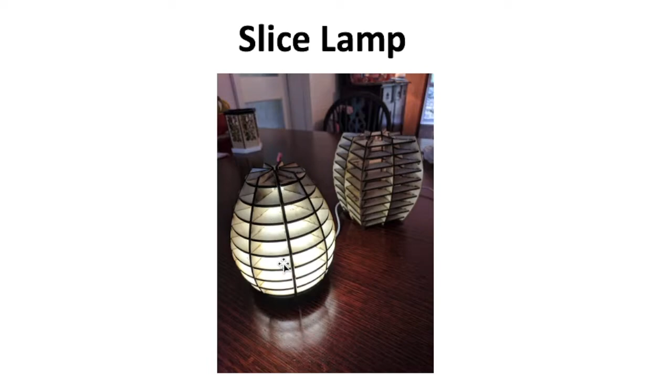In class, we're going to be building a design like this so we can build our own lamp. It's going to have a series of LEDs with a USB cable which you can plug into your computer or a phone charger. We'll make it in slices, hence the name slice lamp. The material can be plywood if laser cutting, or cardboard or plastic fluted board if cutting with a knife.

We're going to start these designs in Fusion 360. We'll then export it to Slicer for Fusion, so you need to install this software, and from that we will be exporting the design into different slices to make the lamp.

Now you can see I've got two different designs here. I've got a round one and a more square one with corners. Depending on how you want to make your lamp, for the round one you're going to use the revolve feature. I've got a sketch which is then revolved or spun around 360 degrees to make that shape. To make one with a more square profile with corners, we wouldn't be able to spin that profile around because you wouldn't get the corners.

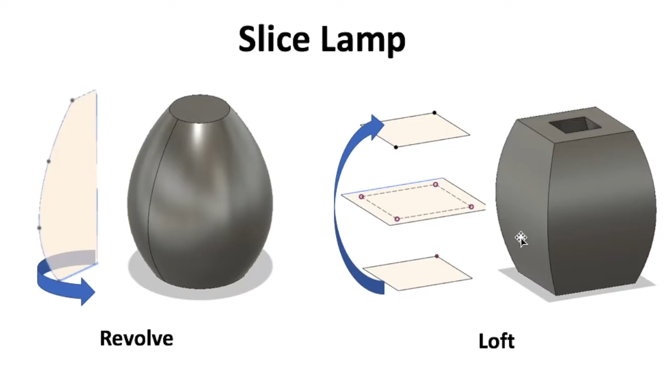We're going to use the loft feature instead. So we're going to create a series of sketches. I've got three rectangles there on three different sketches, and we're going to loft that profile to make this shape. So those are the two features we'll go through to make our lamp. Let's get into Fusion 360.

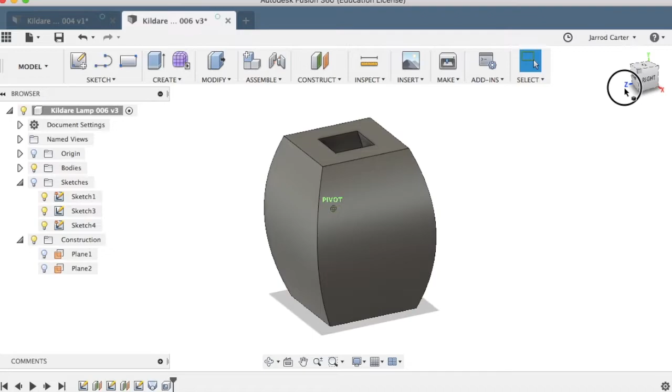We're in Fusion 360 now, and this is the first design I'm going to go through, which used the loft feature. You can see I've got the basic shape there that would make our lamp. So this is what we're going to make, but I'm going to start a new design.

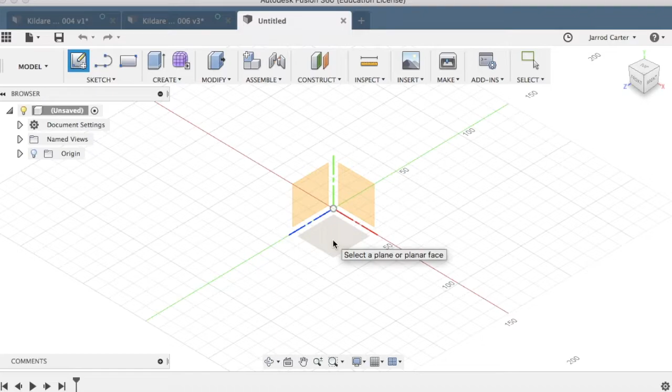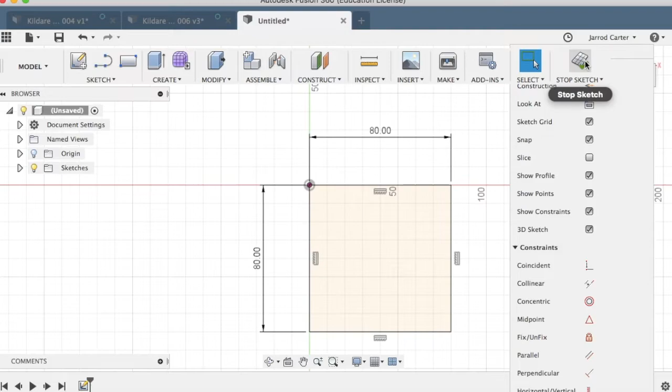The first thing we want to do in our new design is create that bottom sketch. So to do that, I'm going to go sketch, create sketch, and it needs to know which plane. These are the planes, remember that because we're going to make some new planes later. I'm just going to select that plane there, and that's just a simple rectangle shape, 80 millimeters by 80 millimeters. Hit enter, and hit stop sketch, and easy as that, we've got our first sketch there.

Now the second one we're going to do is a little bit bigger, and it's going to be in the middle. But what we don't have yet in this design is one of those planes that I pointed out before, up here in the middle, so that I can create that next sketch.

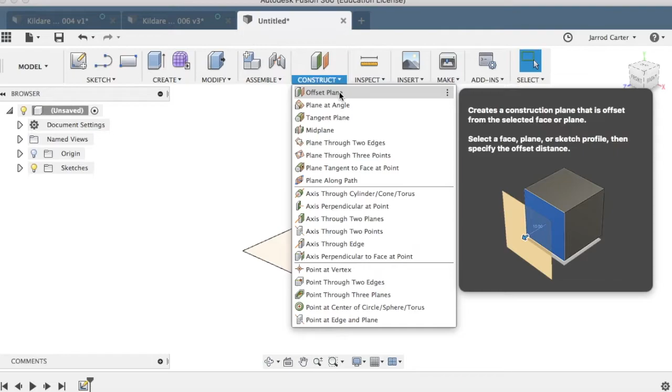To do that, we go into construct, and there's lots of different ways to make more planes, but I'm just going to pick the first one because if you look at the picture, you can see it's just an offset plane. So I pick which plane I want, and I say I want to offset this new work plane above that. I'm just going to pick 70 millimeters, so that's in the middle, and I know that this lamp is 140 millimeters high.

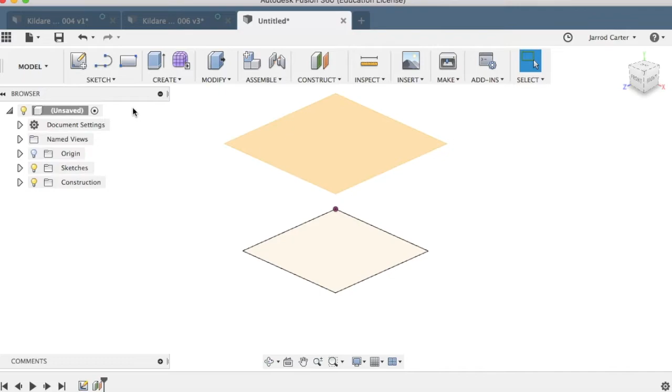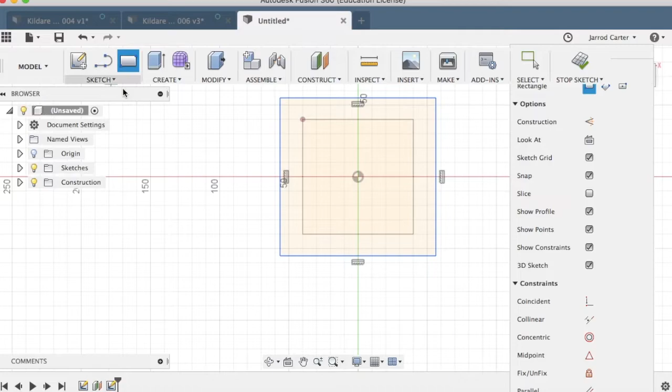You can see this next rectangle is going to be a little bit bigger, so let's get into that. Again, we just go create sketch, I want my new one, and the great thing is I can still see the first one I did. So all I'm going to do is go rectangle again, just the first one, and I'm not going to put any dimensions. I'm just going to draw it out like that, make sure it's bigger, and now I'm going to say how far apart I want it, or how much bigger I want it than the previous one.

I'm going to go to sketch dimension, or just hit D on the keyboard, and put a dimension between these two lines. Remember, it takes a couple of clicks - 1 click, 2 click, 3 clicks. I know I want that 15 millimeters.

You can do your own design. So remember, 1 click, 2 click, 3 click, 15 millimeters again. 1 click, 2 click, click out in space, 15 millimeters. And the final one, 1 click, 2 click, 3 click out there, 15.

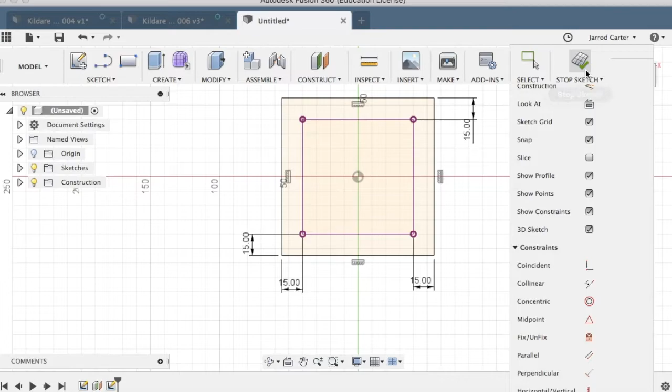I can hit stop sketch again, and just in a few minutes we've already built up the first half of that lamp. Now I need to repeat this first one, up the top, because this is a symmetrical shape.

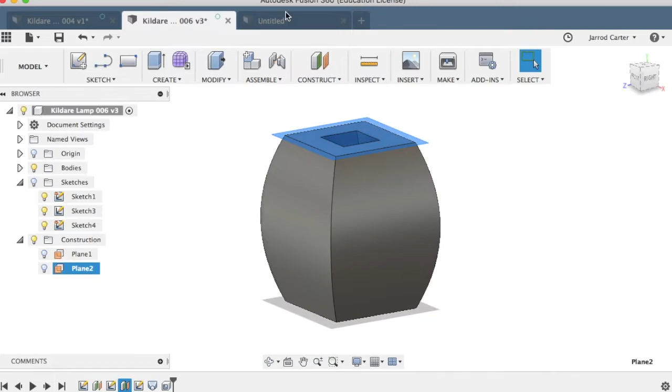But first I need to put another work plane, like I put a work plane here - I need to put another one up the top. We know how to do that: construct offset plane. I'll hit that one. We know it's 70 millimeters up. Great, I've got my 70 millimeters.

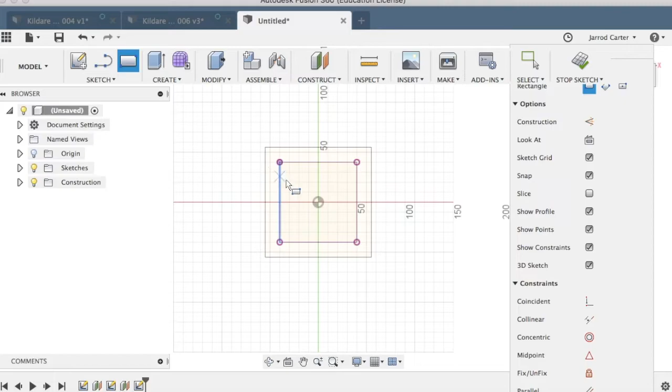I'm just going to create a new sketch again - create sketch, hit our new work plane. Just like before, it's really good that I can work off the information I've already done. So I'm going to go rectangle, choose the first one, and I don't have to put any dimensions in. I'm just going to grab this corner, drag it out, this corner, and I know it's the exact size we want, and there we go.

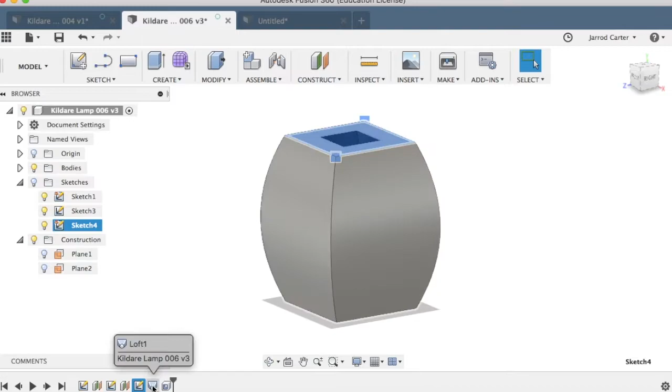So now we have our 3 sketches - 1, 2, 3 - which are going to make up our loft. So there's our loft feature. That's how we're going to build this shape.

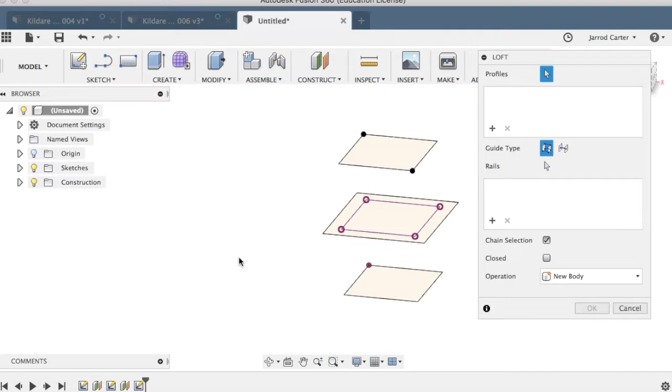So we're done with sketching. Now we're moving on to the creation side, and I'm going to choose that loft feature. As you can see from the preview window, it's creating a 3D profile from different shapes - in our case we've got 3. So it needs to know which shapes we want in our loft.

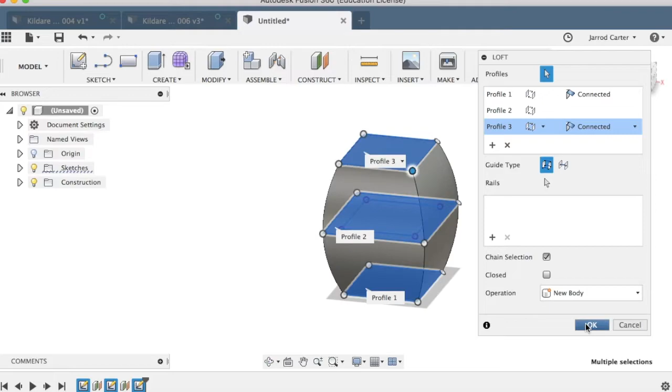I'm going to choose 1, 2 - and notice this one, because it used that information from the first one, I just need to click it twice - and 3. How's that? That's pretty good. Lots of different features here, you can play around with them, but I'm happy with this as a new body, so I'm going to click OK. Now let's just go back to the PowerPoint.

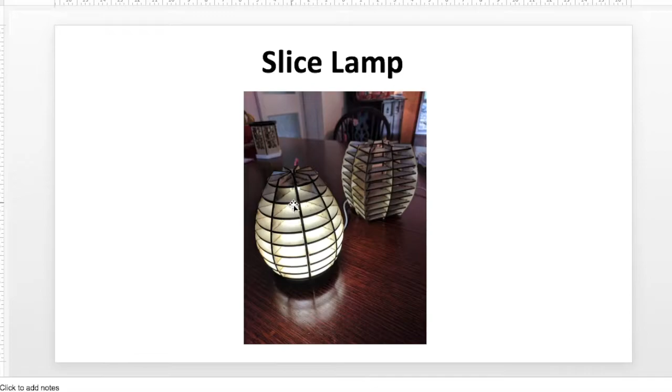To build our slice lamps, we're going to need it hollow in the middle. We're going to need to shell it out on the inside just to give some room for the light to travel between the different layers. So each one of these layers should be hollow in the middle, and you should be able to see that as well. I'm just going to show you how to do that feature.

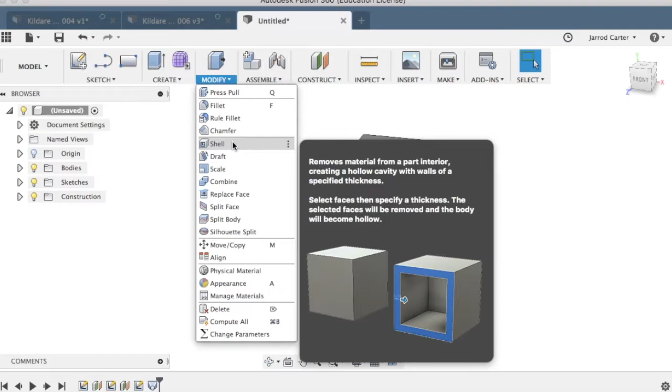We've created our shape, now we need to modify it, and we can see shell there. If you look at the picture, it's exactly what we're going to do - take our solid shape and hollow out the inside. So it needs to know what to keep, so I'm going to say keep that face open.

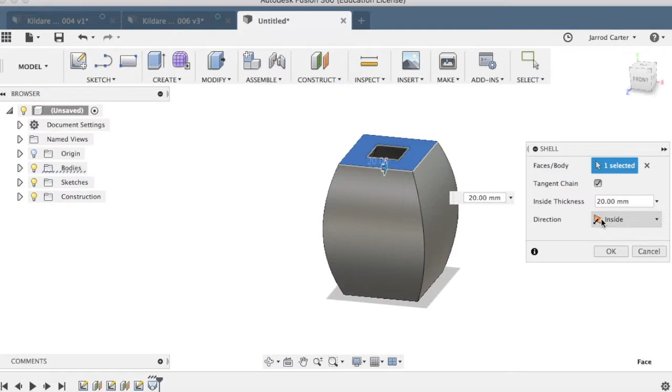I'm going to set my thickness. Now I know from experience with these slice lamps that 20 millimeters is perfect. Obviously we want to hollow out the inside, so I'm going to hit OK. If I move there, it might be a bit hard to see, but that has shelled out the inside in a uniform shape - now you can see it.

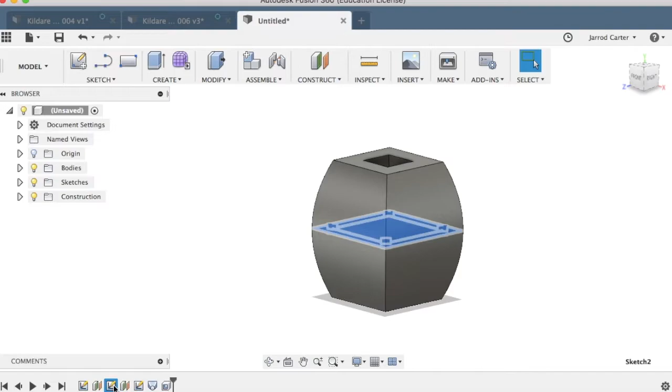So you can see it curves around with the profile - that was the shell feature. So the 3 main ones I used there were the sketch for the rectangle, offset plane to create our different planes, and then the loft feature, which was in create, to make our 3D body, and then just to shell it out at the end, I used the shell feature at 20 mil thickness to get that shape in the middle.

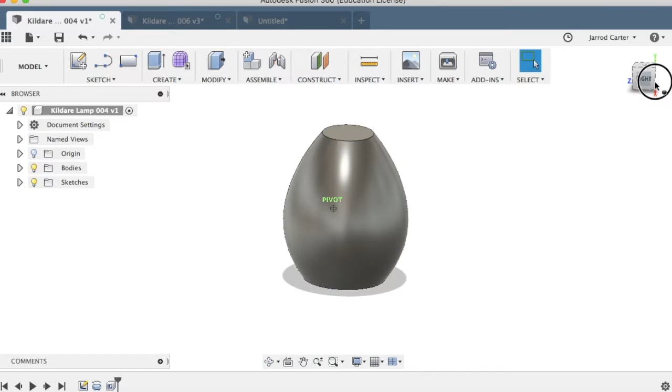Okay, now we'll move on to creating this shape here. Before we used the loft, now we're going to use the revolve feature - I'll just go back to the PowerPoint. So this is the one we've done already.

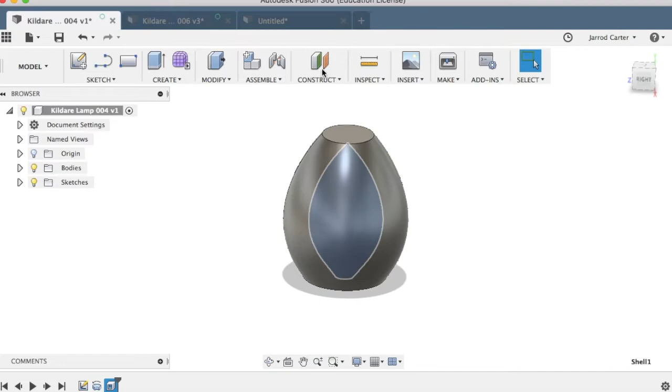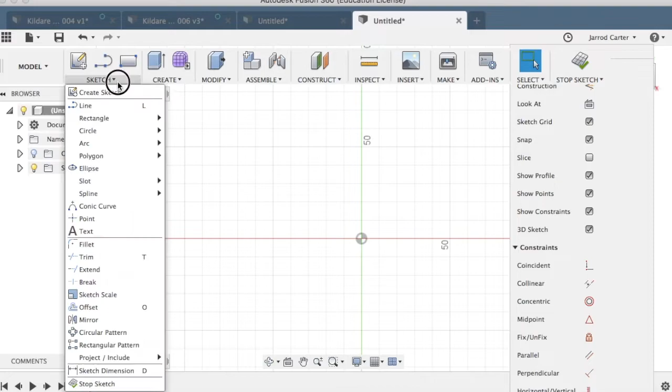I'm going to draw just these 3 lines here. So, sketch and line, or just click L on your keyboard. First one down the bottom is 40 millimeters across. I want my lamp to be 140 millimeters high. Then I'll do one more line, hit L, and make that 25.

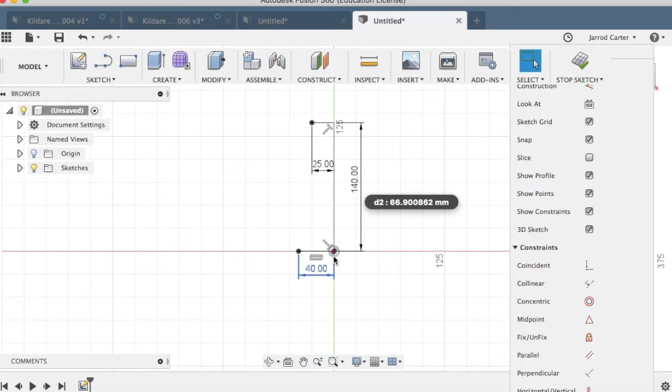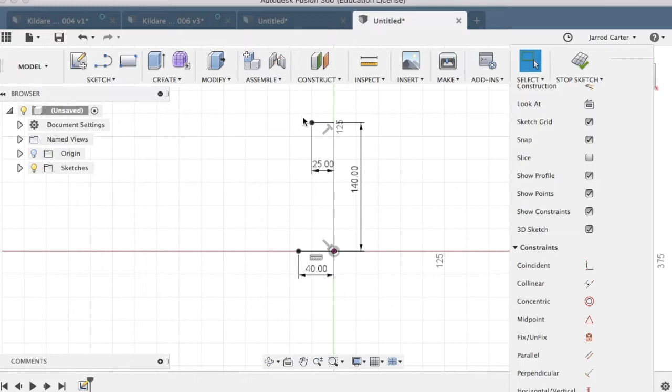One last thing we need to do is put the curved arc in there. Now there's my arc tool, with a couple of different options. Depending on what design you're trying to do, I could just do one arc like that, or I could put in a couple of different arcs to get more of an egg shape.

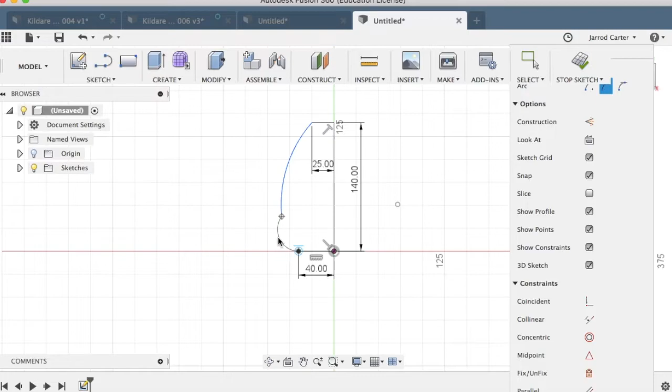So there's one, there's the other, and just make sure it's tangent. There you go. I could even put a dimension between those two values if I really wanted to control it, but I'm pretty happy with that. So I'm going to hit stop sketch.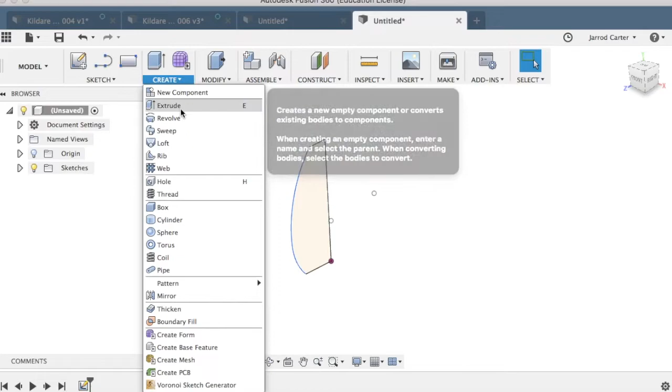Now we've done the sketching, now it's time for creating. I'm going to find the revolve feature. Have a look at the picture - you can see it's taking a profile, spinning it 360 degrees. So it's asking for a profile, which we know, and the second bit of information is axis - the center point of a sphere or any circular shape.

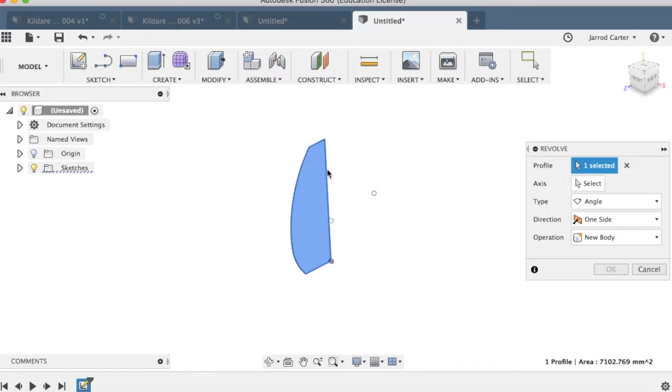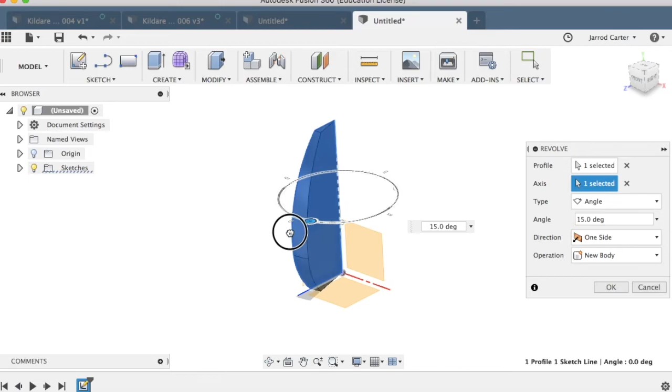This line here is the center point of our lamp, so let's choose that as our axis. And there we go, we've got it straight away. If you're doing designs that don't need a 360 degree shape, you can limit it, but we do want 360 degrees. I'll just type it in here - 360. Okay, hit it, and I want a new body. Great, so there we go.

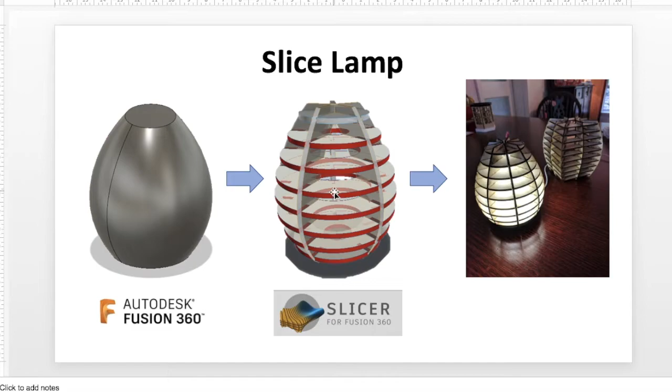I've created it already, but just like this design, we need to shell the middle because we need the light of the LEDs, which will be down the bottom, going in between each layer. If we don't hollow it, the light will stop at the first layer. So remember that was modify, shell. Have a look at the image - it's just taking a shape and shelling it out.

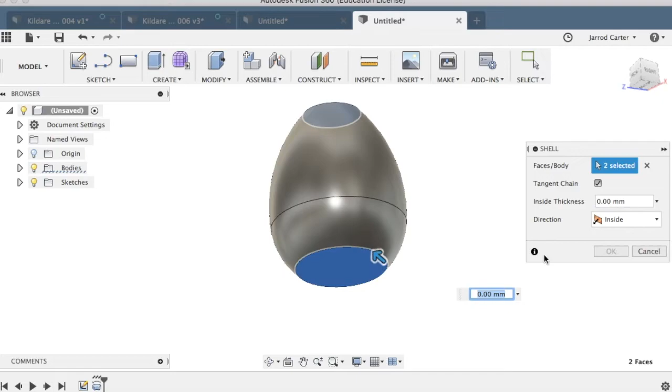This time I might just click both, and we want that thickness to be 20 millimeters on the inside. Now I've shelled out that shape. If I click there, even though we can't see it, the inside of this shape has been shelled out. Okay, so that is the shell feature and the revolve feature demonstrated - that's the Fusion 360 side of the design.

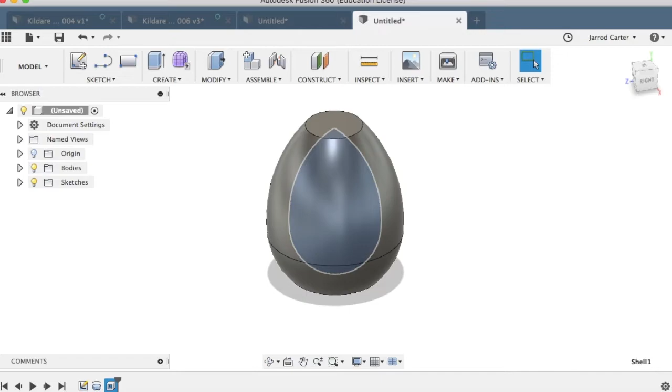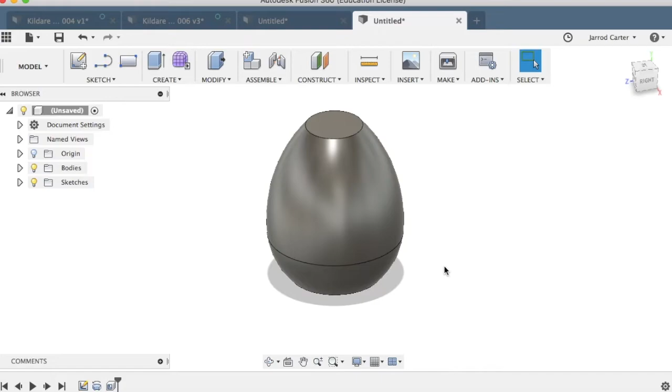Now we need to import it into Slicer for Fusion 360, because that will take our design, slice it, and give us the information we need to build our lamp. You need to have already installed Slicer for Fusion 360, which is a separate add-on that works together with Fusion 360 but is a separate little app.

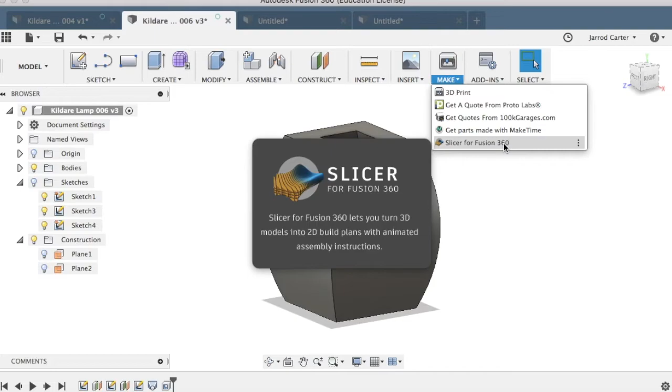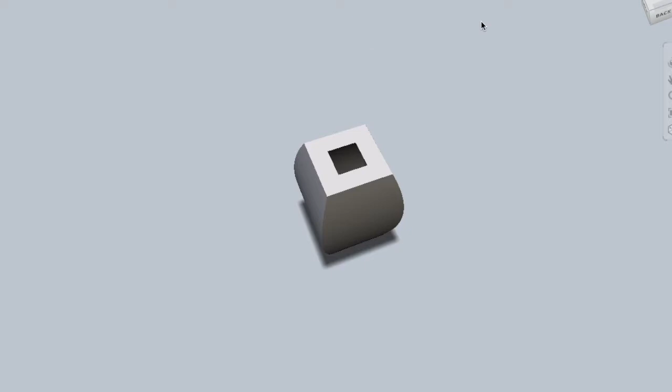Once you've installed it - actually, let's choose this one here - if you go to make, usually we'd go there for 3D printing, but now that I've installed it, I can see Slicer for Fusion 360. I click on that and it asks what you want to slice. I'll select this, and I'm happy with medium resolution. I hit OK, and it's going to think about this for a bit, importing the shape. Now I'll make this a little smaller so you can see it.

Okay, so here's our shape. It's still as it was when we left it. We need to tell Fusion 360 how we want to slice it, and there are many different ways.

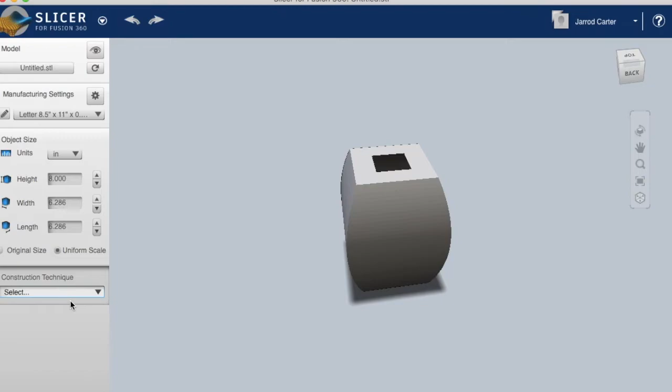We could go with stacked slices, which are just slices on top of each other. Not going to help us with a lamp.

We could do interlocking slices. Okay, looking a little bit better. But the one we're going to use for our lamp is radial slices. So you can see radial slices there, being these that go around in a circle, pointing all to the middle.

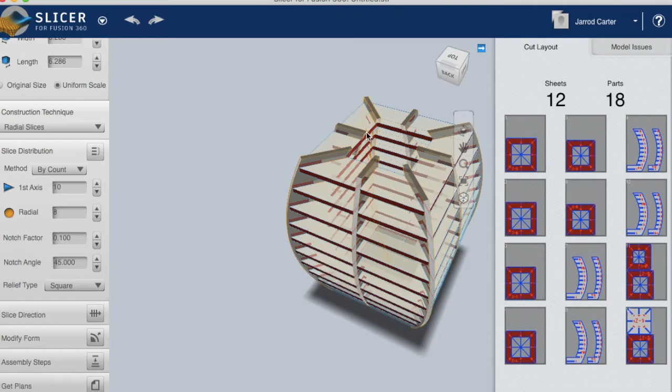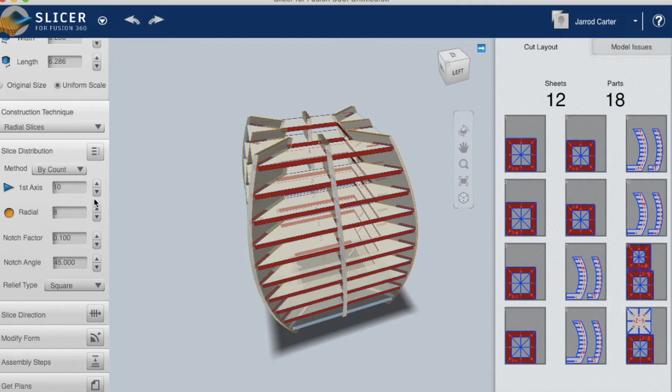Getting there, that's not too bad, but I know if we try to make this, there are probably too many slices. So on the first axis, it says there are 10 layers going from top to bottom. From my experience making a lamp, let's just change that to 8. You can go down less if you want, but 8 is a really good number when making one of these lamps.

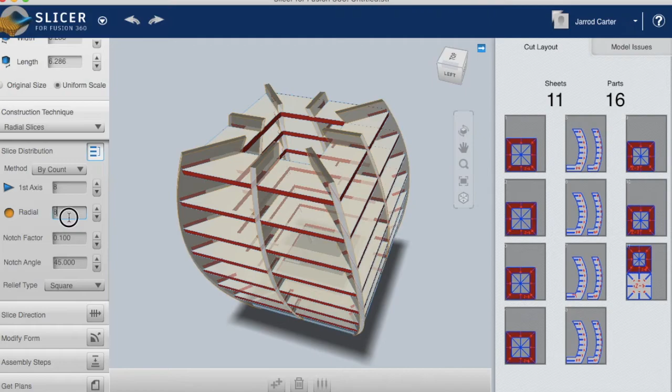On the same idea, we can also reduce the number of these slices. So I'm going to take that down to 5. I find 5 works really well for one of these lamps.

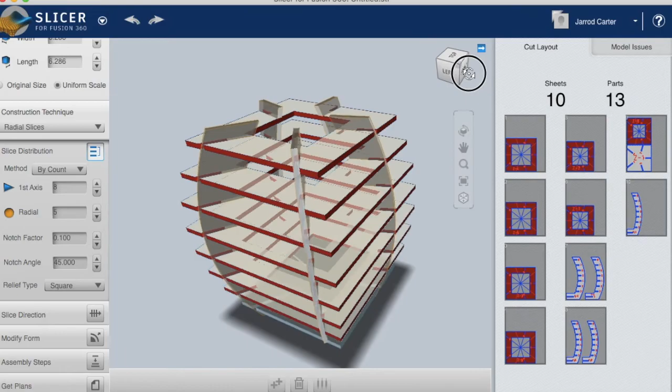As I keep doing this, you'll see these pages over here. Each one of these is actually one of the slices, and you can send this information to either a laser cutter or just a normal printer if you want to print it out on paper to cut out on our flute board.

Okay, so I've got the number of slices I want, both this way and the stacks. Just a bit more information. It's currently in inches, so I'm going to change that to millimeters.

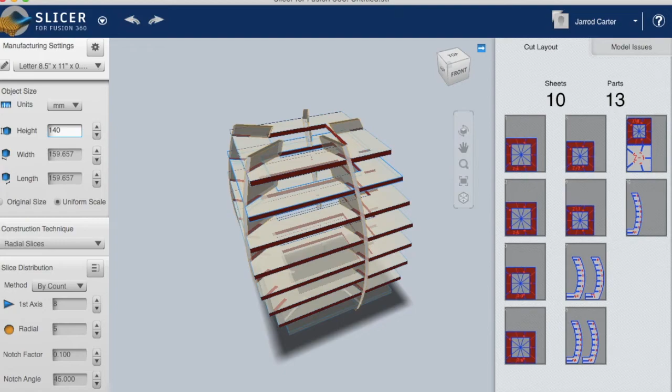I don't know why it does this, it always changes the height. So here it says 203, but if you remember, when we did it in Fusion, it was actually 140. So I'm going to change that to 140 millimeters and hit enter, and all the rest will update as well.

You can see I've actually reduced how many pages this is going to print, just because it's back to its proper size. Now, depending on what printer you're using, I'm using A4 paper, so I'm going to change the paper to A4.

One last setting we need to do: if you hit manufacturing settings, it will give you the material size, which is really important. So I'm going to change that to millimeters. Now, the height and width we don't change because that's our A4 piece of paper, but the thickness is really important.

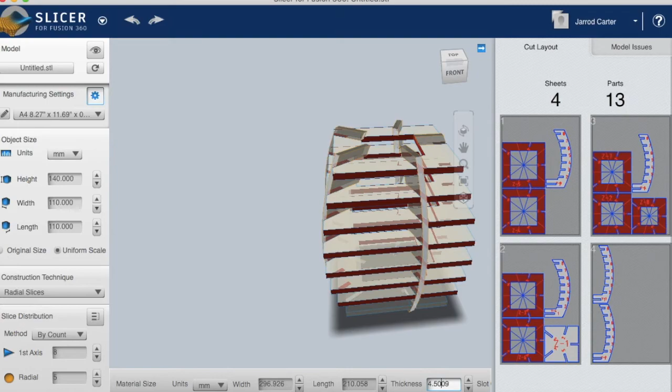We need to make sure, I've got mine set to 4.5, which is right for me because that's the thickness of my fluted board. But the offset, I'm going to change that to 1 millimeter, which just changes the offset in between the slots, which will mean our fluted board will assemble nicely. That will depend on what kind of material you're using.

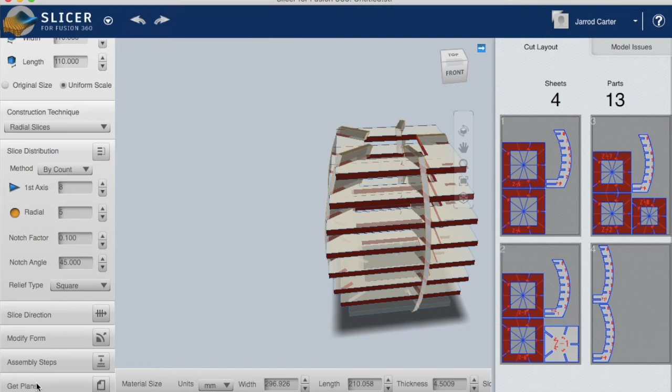The final thing we need to do is just to get plans, so I'm going to hit get plans. Because I'll be printing this on a normal 2D printer, I'm going to make a PDF. You can either export that to your computer or print it. Once we print that, we can cut it out to make up our lamp. If you're using a laser cutter, you would have to export as DXF, and the laser cutter will read that file.

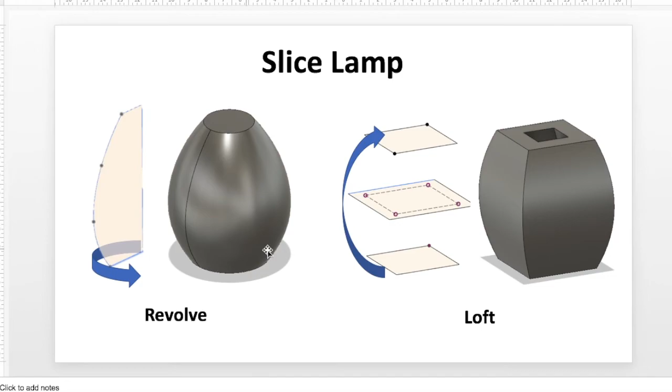So just to sum everything up, we used both the revolve feature and the loft feature to build our shape. Once we were in Fusion 360 and had the shape we wanted, we went to make slicer for Fusion 360.

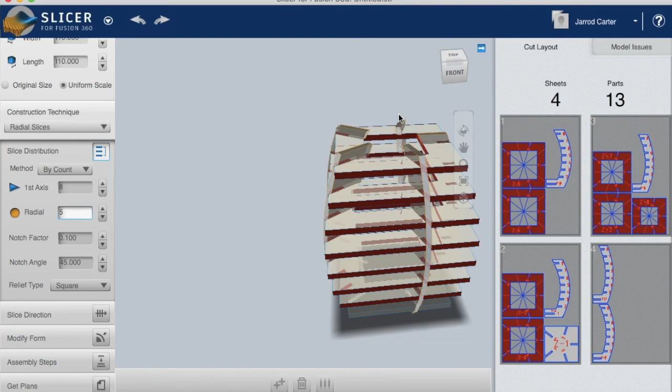In the software, we had to make sure that we had the right paper size. We had to make sure we were using radial slices as our construction technique. I'm recommending that we have 8 layers stacked up with 5 radial slices at the top. And under manufacturing settings, just make sure you have the right...

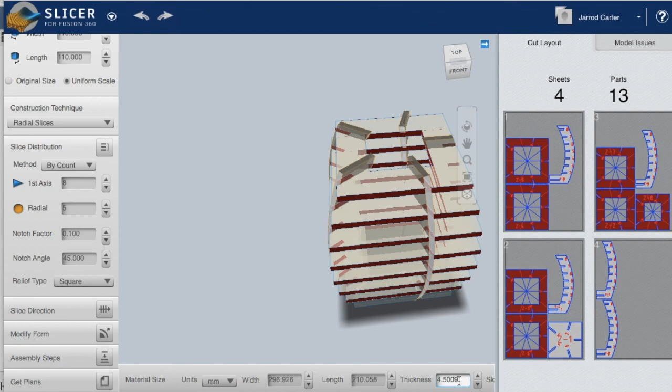...thickness and slot thickness as well. So the right thickness for the board you're using and an appropriate offset to make sure that they all go together correctly.

Okay, enjoy making your slice lamp in Fusion 360.